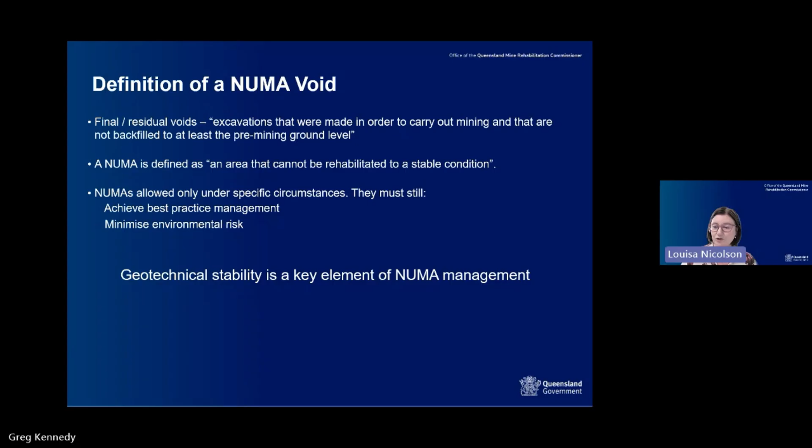And so with those definitions out and we're on the same page, it's my pleasure now to introduce our authors for this practice note who are going to present to us today. So it's wonderful to have Greg join us. Greg is a principal engineering geologist at PSM. He has over 16 years experience working on various domestic and international mining and civil engineering projects. Greg's worked on projects across Australia, Asia and the Pacific, and interestingly, this includes the geotechnical superintendent role at Ok Tedi mine in Papua New Guinea.

I suspect, Greg, that was quite interesting but challenging all at the same time.

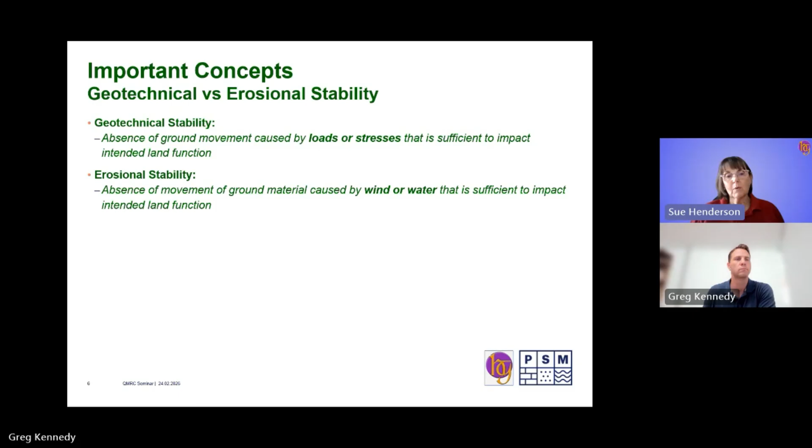Next one that we need to hammer home, and we will be for some time in this talk, is that geotech stability is not a certain thing. We can't quote it to 3 decimal places, or if we do, we're kidding ourselves. Some of the reasons: the profile has not been designed by us. Whoever put it there is a bit wacko at times. So there's random layers and pockets. Soil and rocks are not manufactured materials, so they don't have a predictable QA'd band of properties. The properties they do have can vary with the load history, also moisture content, time, and of course spatial variation.

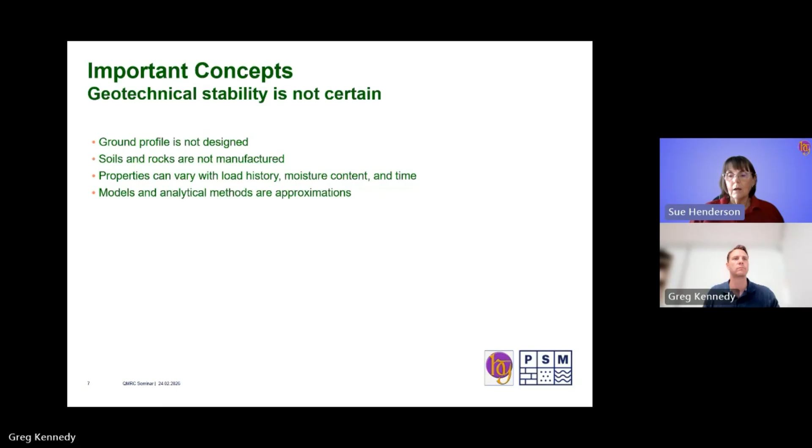The models that we use to analyse stability are approximations, and how accurate a particular model is really depends on how well it captures the important aspects in this particular situation. So the upshot of that is there is no single correct answer for stability. Instead, what we as geotechnical engineers have to do is define a threshold or an acceptable outcome that's based on both the confidence we have in our particular model and method of analysis, and consequences of instability. And that requires judgment. It's not something you can dial up out of a recipe. So that's where the professional training and experience comes in.

Given the uncertainties, the load history, moisture effects and things like that, an appropriately qualified person can't guarantee stability for a significant time into the future. All we can certify is that we have evaluated stability using sound and accepted procedures.

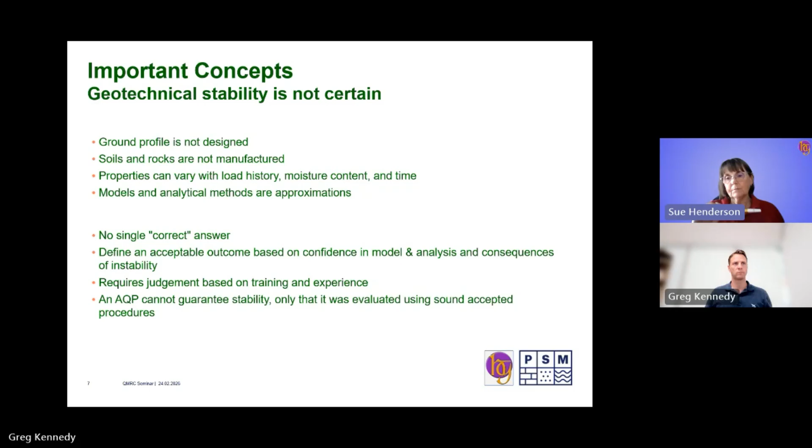Next idea here to put out is that it's not about maximising or minimising risk of instability, because what you do to improve stability can make other aspects of your NUMA worse. First example, flatter slope usually improves stability, and it certainly can reduce uncertainty. However, it also increases your void footprint. It may increase the catchment, which leads to a high pit lake level, which in turn might saturate more of your low wall and change your stability.

The longer slope may actually be subject to increased erosion, and flattening the slopes, particularly where you've got a dump, will reduce your dump space that way, so that what you would have put there, if you could have justified a steeper slope, you've got to find somewhere else to put that material.

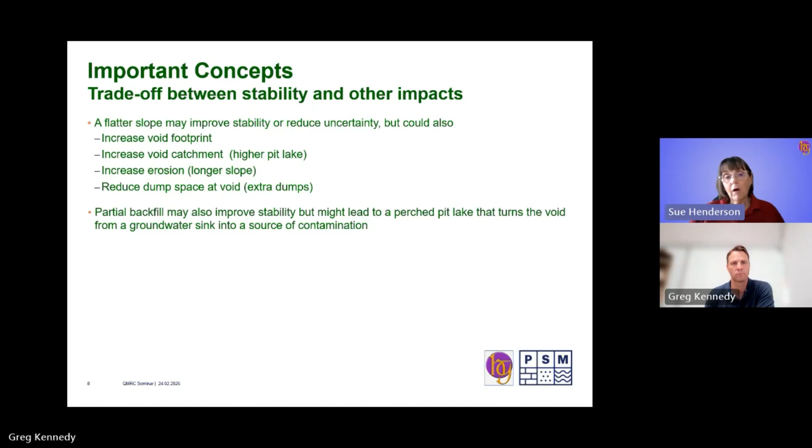Another example, partial backfill of voids, that can improve stability, usually by just reducing the exposed height of your walls, but it can lead to a pit lake, and that might turn what would have been a void that is a sink for groundwater into a source of contamination to aquifers.

So once again, we come back to this: rather than maximising stability, aiming for an acceptable level of stability. That depends on consequences, and considering that, particularly in the context of this practice note, we've got a NUMA, but it's got usually adjoining post-mining land use areas. So while this practice note is about the NUMA, one does have to give consideration to the adjacent land.

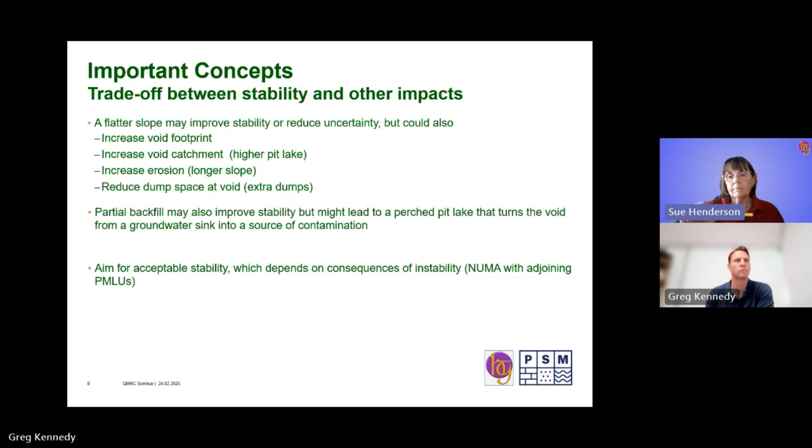So if all of these things and bad news about what we can and can't do hasn't come home, the basis is we can't certify in the long term. If we're uncertain now, the uncertainty can only multiply the further into the future we go. Trying to, as the AQP, assess what's a reasonable frame. If you think about living memory, 60 to 80 years. There are photographic records of landforms in Queensland in our area of about 160 years that you could use to gain some insight into the long-term changes.

In civil, design life is about 60 years. Even your critical infrastructure like hospitals is only about 100. So they set the time frames on which accepted understanding is that we could reasonably make some forecasts. So on that basis, we're suggesting that the range for long term is in the order of 60 to 100 years, to be decided at each assessment based on the information you have, the complexity of your model, how confident you are.

Quick pause for any comments or questions on that stuff. We haven't had any questions come across into the chat or the question and answer yet, Sue, so we might just keep going, I think. Thank you. Oh.

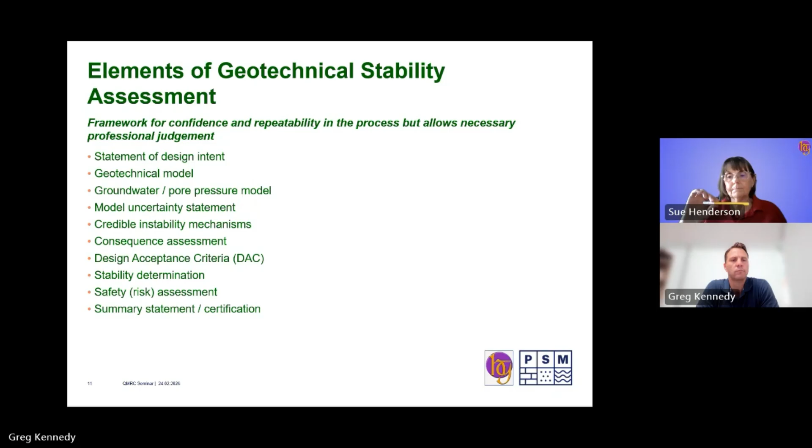So the first component, statement of design intent, is really where the geotech engineer just communicates out in the report to the audience what the point of it is. It's a typical scope and limitations type introduction to a report. Obviously, the purpose, the location of the NUMA, given the number of peer reviews I've done, that becomes very important. The time period that you have assessed, where in the 50, 60, 100 years you feel confident to forecast, and importantly, any changes that would mean you need a reassessment.

I'm not going to go through this. It's just an example of a statement that I put in, so it'll be in the slide pack and presentation, but it's not a difficult thing to cover, just important to put it there to hold the whole assessment together. Now we get on to some of your engineering stuff, and I'm going to pass over to Greg to carry on. Thank you.

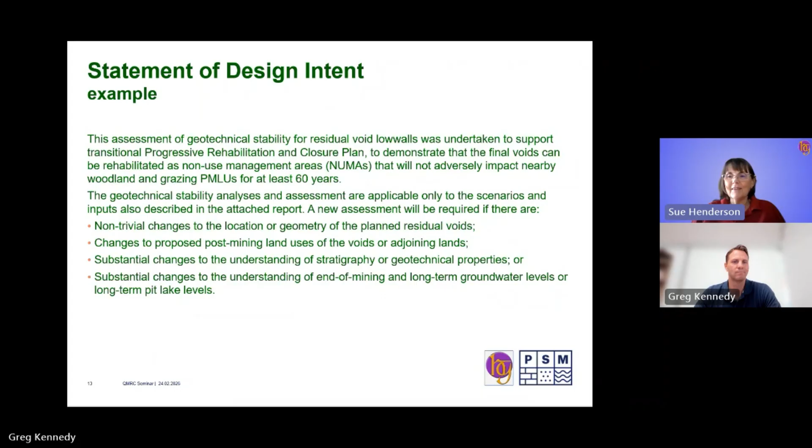Thanks, Sue. Unfortunately, I'm going to start with a definition as well. So the definition of the geotechnical model, the Australian standard gives a great one. It's the interpretation of ground conditions in a form useful for engineering design or assessment. It may contain a subsurface model detailing geological and engineering characteristics of various materials and groundwater. So obviously, ground conditions, especially over a mine site scale, are often complex and highly variable. And one of the most important tasks for the geotechnical practitioner is to review and simplify these variable ground conditions as much as possible into something useful, i.e. a clear and logical framework that can be confidently used for stability analysis and design.

The geotechnical model, obviously the ground is in 3D. It presents and communicates the ground conditions. Models can be 3D or 2D. Many of the components of today's geotechnical models are created in 3D, but stability analysis can be either 3D or 2D, depending on the mechanism. And most often the model is illustrated in reports in 2D cross-sections and plans.

The closure geotechnical model should include information on the landform design. So that's anything like the pit design, the surface topography, mining, environmental, cultural heritage, or public lease boundaries, and any infrastructure such as buildings, drains, or flood levees. It also includes the geological model. That'll include information on the deposit type, because that's quite important to understand the geotechnical conditions, the stratigraphy, lithology, weathering, alteration, and distribution of geological units.

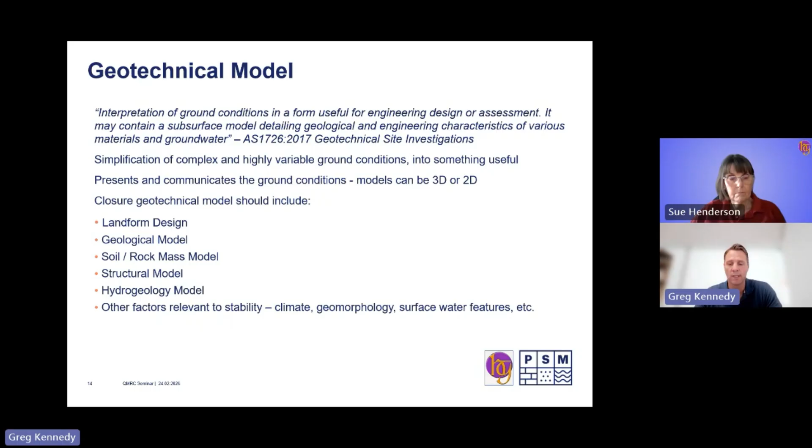There's also other factors which could be important. So the climate is one. A mine site located in the tropics, for example, will perform differently from a geotechnical perspective to a mine site located in the arid desert, just due to the amount of rainfall. A high rainfall environment is going to advance your rates of weathering, erosion, and result in a lot more pore pressure loading events on the slope, which can have an adverse impact on stability.

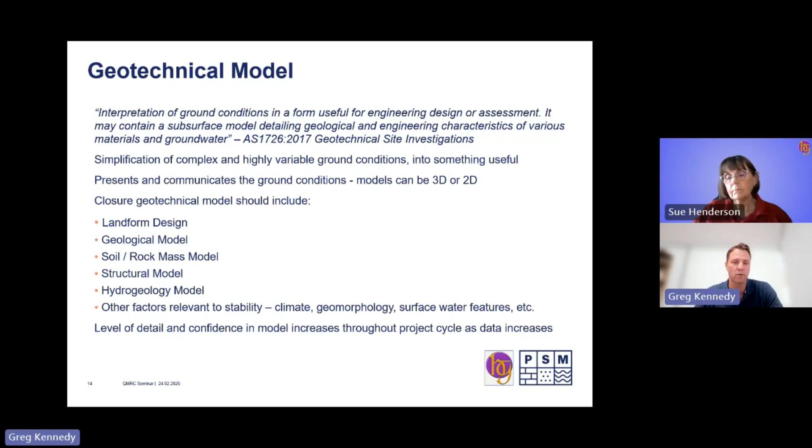The level of detail in a model typically increases throughout the project cycle. Obviously, a model developed during the planning stages of a project, which is likely to only be based off a small number of boreholes, is going to have a much lower confidence or higher uncertainty than a model based on excavated slopes for an operating mine that's approaching the closure stage.

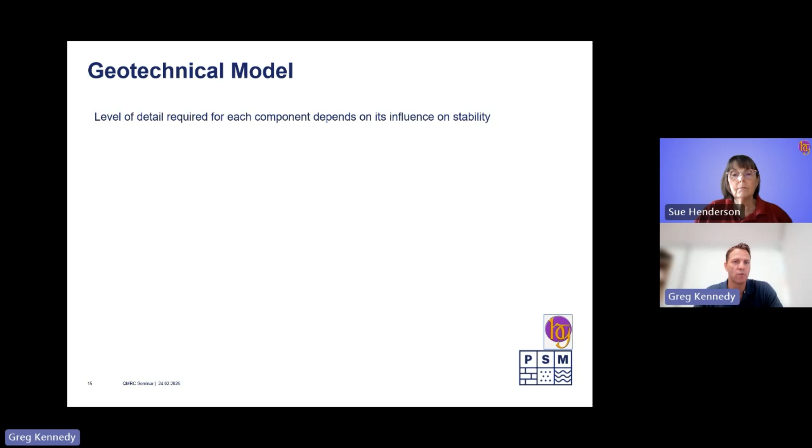The level of detail that's required in each of those components really depends on its influence on stability. Within a soil or highly weathered rock mass deposit, the material strength governs the stability, and pore pressures also play an important role. Within certain types of deposits, such as residual soils like saprolites, the relic structure of the parent rock mass can also influence stability, so that also needs to be considered.

Within soft rock, which typically includes Queensland coal mines, all aspects are important, but intact and rock mass strength and structure are typically the most critical, and pore pressures do play an important role in certain situations such as footwalls or where the stability of the wall is already marginal. Within certain mines, there's some geotechnical features which deserve particular attention. So within coal mines, bedding orientation, bedding strengths, whether it's sheared or not, and the presence of any weak layers such as tuffaceous units are very important to identify, as they quite often have a big influence on the stability.

Within hard rock, stability is entirely controlled by structure. Where the structural stability is marginal, pore pressures, and in particular transient pore pressures, play a big role in influencing the stability. So during high and prolonged rainfall events, the transient pore pressures can load those structures which may be marginal and cause movement and deformation in the slope.

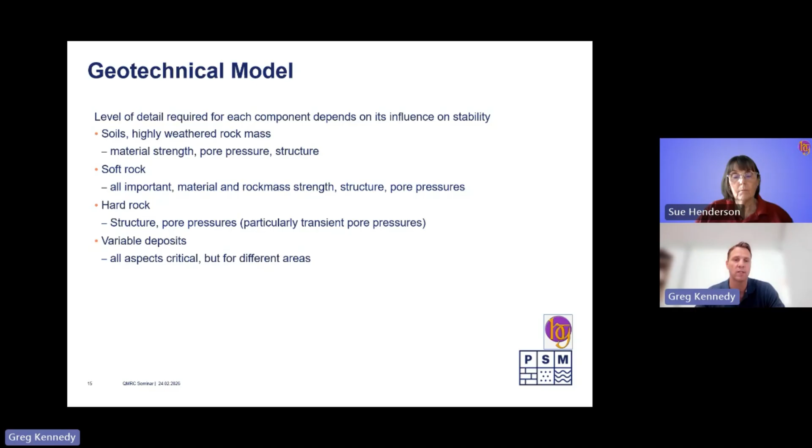The model for closure is similar to an operational design, but it needs the additional focus on the long-term effects on material properties and performance. So things like weathering, degradation, durability, and erosion over time. This slope here provides a good case study of why that is important. This slope was excavated within tertiary sediments, so lignites, clays, some reworked basalts, which have since weathered into clays. And these were all capped by an overlying cap of fresh basalt, which continuously recharges groundwater into the underlying clay units.

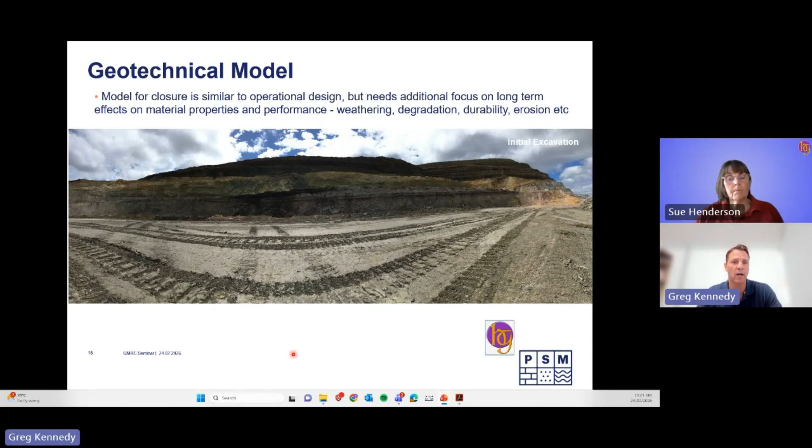The slope was excavated within a strip mine, so pit walls were sort of turned over every 9 months. The material was relatively stable for those short time frames required for a strip mine. But then mining unexpectedly stopped in the strip, and as the material was prone to desiccation and strain softening over longer time periods, the slope began to deteriorate and experience progressive failure. So this is 18 months after the slope was first excavated, and more recently 6 years after, and you can see the effects of this progressive failure on the slope here. So this serves as a good example of why closure models need to include potential long-term effects on material properties and the failure mechanisms.

We're going to go through a couple of case studies now to illustrate geotechnical models and how the different important components are presented. We've got one case study of hard rock, which I'll go through, and then Sue's going to go through a coal example.

So for this example, this is pretty simple geological conditions. It's an intrusive deposit with shear-hosted mineralization, has various types of granite lithologies with pretty gradational contact boundaries between each, but they're all very similar from a strength and durability perspective. So the geology model doesn't actually have a huge impact on stability.

For the rock mass model, there are some localized brecciated zones around faulting, but typically it's all high strength, it's all blocky rock mass, and it's not a critical control of inter-ramp or overall scale stability. It does control the bench scale to a certain degree.

The hydrogeological model, the VWPs installed in the slope show a depressurized slope. So as the mine progresses, the slope quickly depressurizes. But this mine is within the tropics. So transient pore pressures from the wet season, from those high prolonged duration and high rainfall events, do have an impact on stability wherever the structural stability may be marginal.

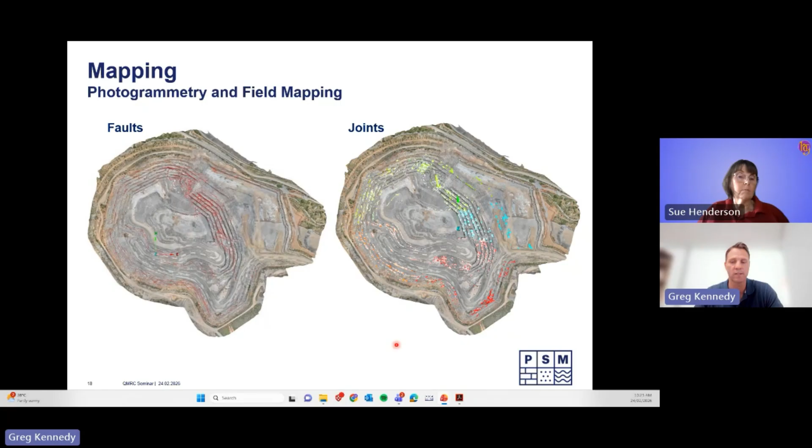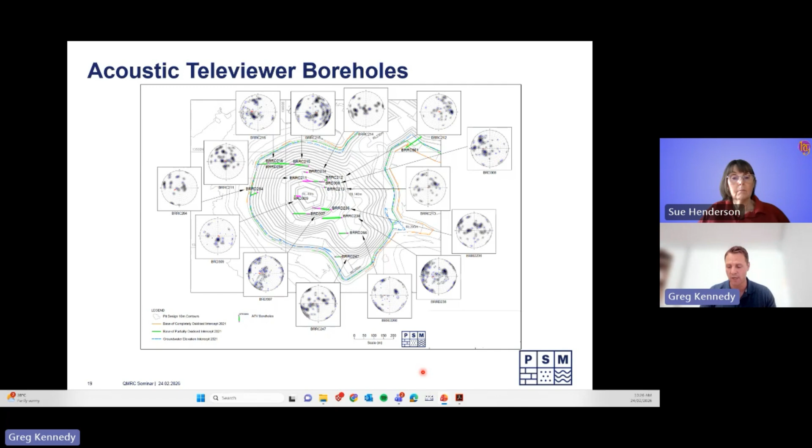We also reviewed a lot of acoustic televiewer boreholes beyond the pit slope to try and get a better understanding of the conditions beyond the pit walls. For any geotechs and geologists there, you'll see there's quite a bit of scatter within all these boreholes. So this is a very complex, structurally complex system.

We then used all that data to create a detailed structural model covering the key influences on stability, such as we created 3D surfaces of any major faulting that were inter-ramp scale or greater. We also came up with structural domains. So these are areas of similar structural conditions, which really help to remove the scatter from a particular area and make sure you're only making the assessment based on the data that's actually within that spatial area.

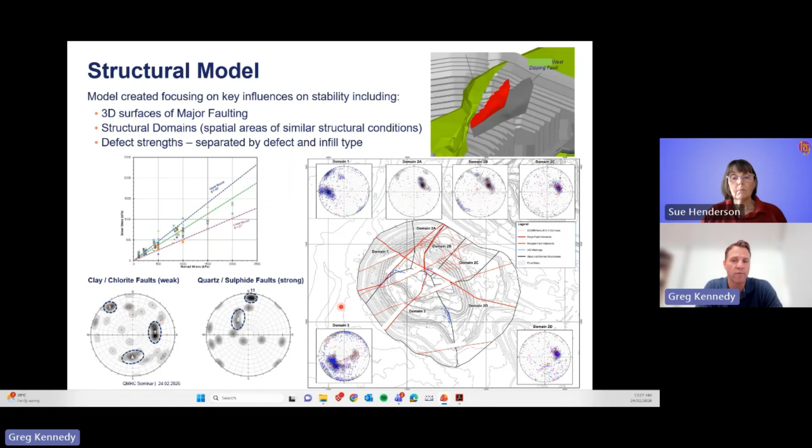And we also did a lot of work looking at defect strengths, separated by defect type, then infill, and we were able to do that from the field mapping exercises and drilling and laboratory testing. So this model then allowed us to identify and quantify the credible failure mechanisms for each area of the pit, which I'll go over a little later in the presentation.

Okay, I'm here to reassure everyone that we don't always have to have it quite that complex. This is an example from the other end of the spectrum. Coal low wall. The void was about 100 metres deep, had a relatively steep floor dip, steep coal seams. 2 strips were mined out by truck and shovel, and as is typical in strip mines, some of the spoil was dumped back into the pit against the box cut.

A creek overflowed into the pit while they were still mining, caused large slips in the low wall, and that was when mining had to stop. In the 10 years since, there's been a bit of continuing movement at the cracks, but no further large slips.

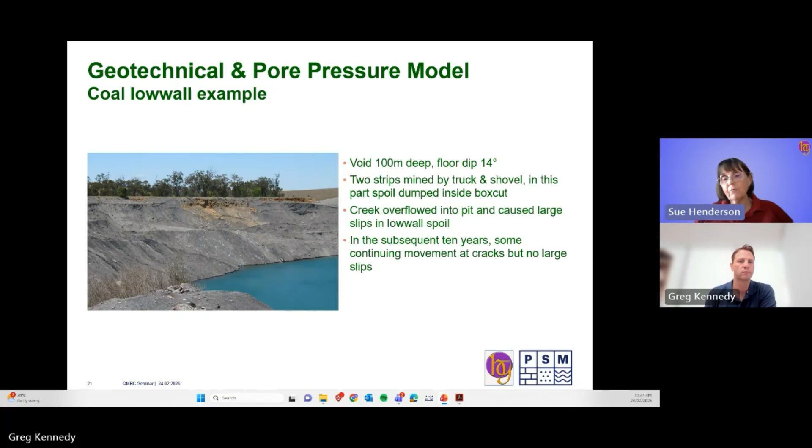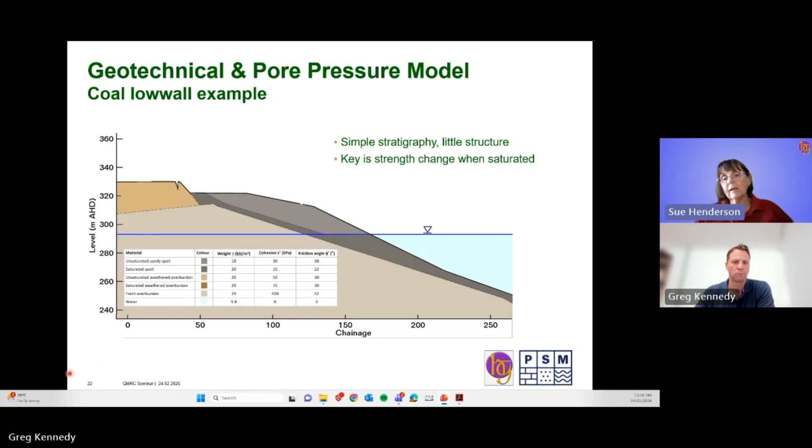So in this case, strip mine 2D analysis is fine. You can see that it's a very simple stratigraphy, not much structure, which is typical of spoil. The key driver to stability in this case is the strength change when that spoil becomes saturated. So for the long-term stability assessment, we have to look at the pit lake as it is now and the predicted long-term pit lake level and carry the analysis out on that.

Another example, this was a coal high wall for a PRCP final void. I haven't got a photo of the wall because it won't be mined for decades. So it's really a planning stage, remembering that the PRCP planning part is to demonstrate that you can achieve the requirements of rehabilitation. So the geological model was used to develop the profile, the different layers.

Hydrogeological modelling from the PRCP and the void water balance modelling gave us the boundary conditions for pore pressures that were analysed between the two. And being central Queensland, there's a fairly good mass of published strength properties for your tertiary, weathered Permian, fresh Permian, those aspects. Simple model, but for the long-term planning at this stage, perfectly adequate.

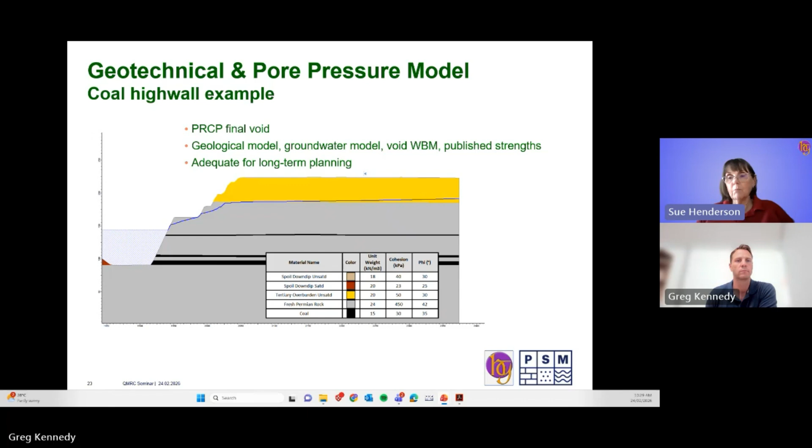Hopefully we've hammered this enough that with the model, we cannot be certain. There's a high level of uncertainty in developing the model. So instead of trying to ignore it or spend an unreasonable amount of effort minimising it, the approach is to address it and admit it. And this is probably one of the key things in both the ACARP and the practice note, is that we've developed an uncertainty rating sheet for the geotechnical model.

There are 8 model elements identified, and there's a score assigned to each that reflects their relative importance. And there are different scores for the hard rock and soft rock examples. 4 uncertainty levels for each of those, ranging from what is nicely called introductory to a low uncertainty, which would be when you've done a lot of work testing and probably have the wall there with observation. Description for each combination of model element and level, and simply you sum the score for the element times the weighting for the level, add all of those together for the different elements to get an uncertainty ranking.

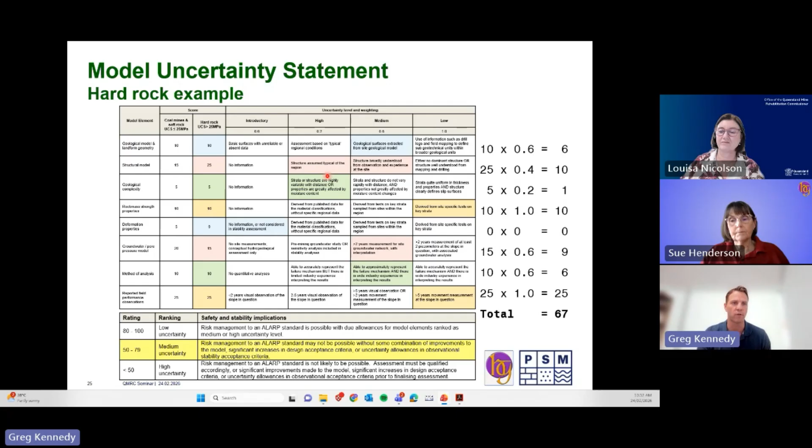Okay, so thank you everyone for starting to put some questions through. That was a really important session, I think, Greg and Sue, because firstly, it was important for us that this work could be broadened out to discuss hard rock mines and the differences for an assessment that are relevant there. And then also that the model uncertainty statement, I think, is really invaluable to this process and to helping us understand the approach, so thank you for that.

We have a question here about closure model best practice. Should parameters around weathering, degradation, etc. be site-based and lab tested, or are regional database inputs sufficient? Will I throw that question to someone in particular, or do we draw straws? I'll start. Thanks, Sue.

One of the problems, well, horses for courses, it depends on how important things are in the model and in the anticipated mechanisms. Weathering in particular most of the time looks worse than it is. It tends to be a very shallow effect. And so, except for particular cases where you have persistent weak layers, it doesn't penetrate very far. I remember reading one of the highest rates of soil development measured is about 8 mil a year. So what we get on the surface is a degradation and a raveling, which is an aspect of weathering, but it's only physical. But it tends to look worse than it really is.

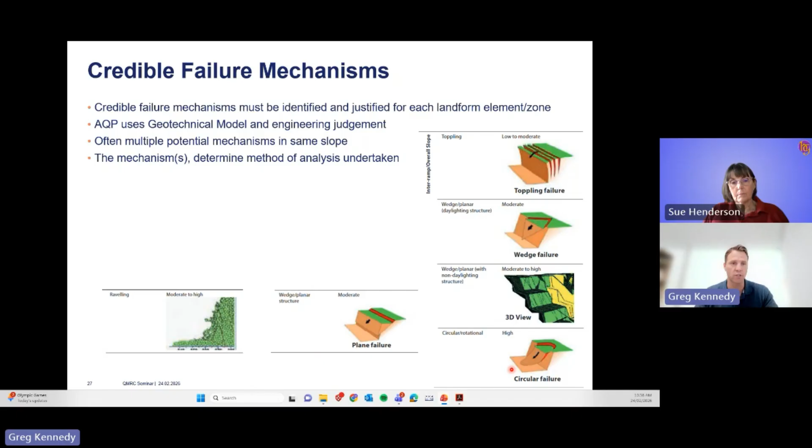The mechanisms identified will determine the method of analysis undertaken. And again, that's up to the practitioner's judgment to decide what method of analysis is appropriate. And the assessment of the failure mechanisms needs to account for these changing conditions over time. So like we were saying just before, the weathering, erosion, changes in groundwater is an important one for closure, because you've got to not only assess the groundwater conditions when the day mining finishes, but also the final pit lake level and potentially any stages in between.

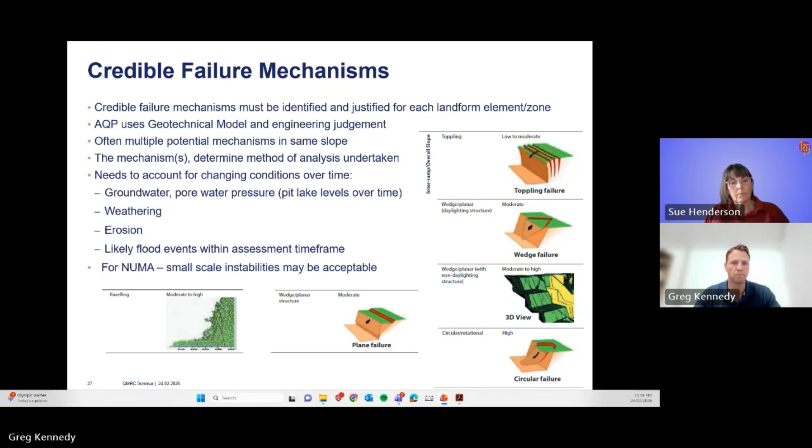And for NUMAs, small-scale instabilities may be acceptable if the consequence of failure can be proved to be negligible or low. The consequence assessment, this aims to identify the likely harm if instability was to occur based on the identified critical failure mechanisms. This table's been taken from the ACARP study report and can be used to help guide the assessment. The assessment ranks the potential consequence of failure from negligible to high consequence against 3 harm categories. So harm to humans, environmental harm, and property loss and damage. And the table provides some qualifiers to help guide the practitioner's selection for each.

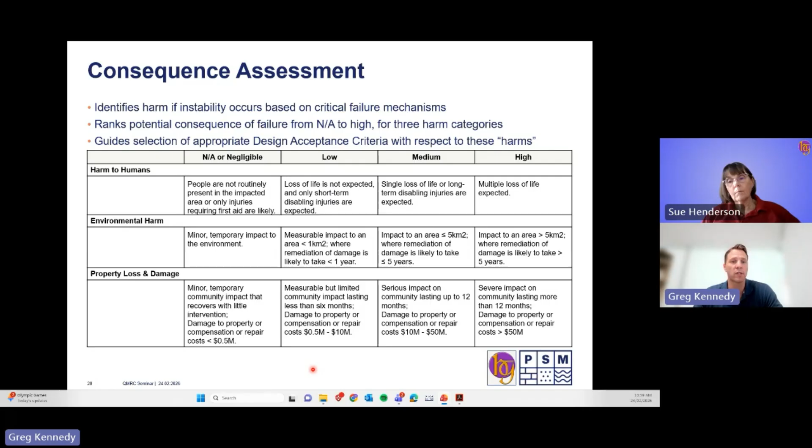And that's been assessed to have a moderate consequence of environmental harm, just due to the fact that if the slope failure was to occur in there, extending into the waste dump, the failure would mean there's some moderate rehabilitation, remediation earthworks required if the failure was to extend in there, just to be able to remediate that failure.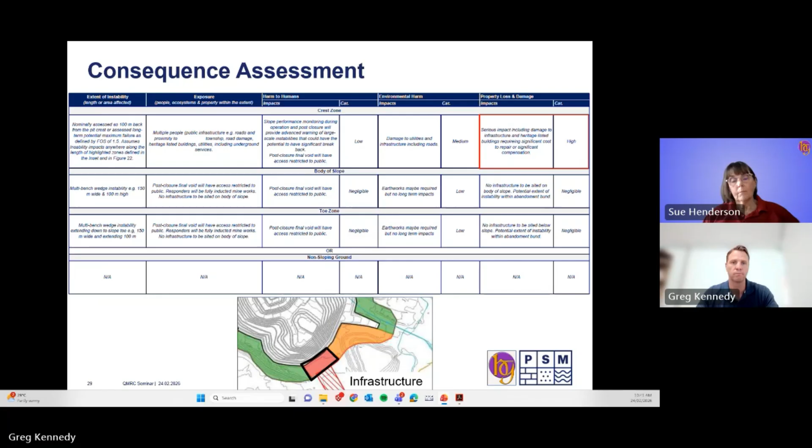The rest of the pit didn't really have any infrastructure or anything near the crest, and access was going to be excluded on closure, and therefore the consequence of failure was assigned negligible or low for those areas. The design acceptance criteria defines a threshold for acceptable stability. So if a landform achieves the design acceptance criteria selected, then it can be considered geotechnically stable.

There's a lot of different methods of stability analysis, and each of these different methods can produce a different parameter value for the design acceptance criteria. For example, a factor of safety. The factor of safety is the ratio of available shear strength of the soil or rock mass to the shear stress required to cause failure along the potential slip surface.

A strength reduction factor, or SRF, is a factor by which the shear strength parameters are progressively reduced until non-convergence occurs within a numerical model, i.e. failure. And SRF and factor of safety are typically taken to be the same. A kinematic probability of failure, POF, is used for structurally controlled designs and is the likelihood, expressed as a percentage or probability, that defects will intersect to produce an unstable volume of rock mass for any given slope orientation.

There may also be other design acceptance criteria more appropriate for the situation. An example could be acceptable deformation limits, where minor movement may be tolerable, so all slopes do move. Some mechanisms, such as toppling mechanisms, can move a long way before the slope progresses to collapse. I've personally been involved in managing a slope which moved more than 10 meters and didn't end up progressing through to collapse. So deformation limits may be an alternative design acceptance criteria if small but manageable movement is anticipated.

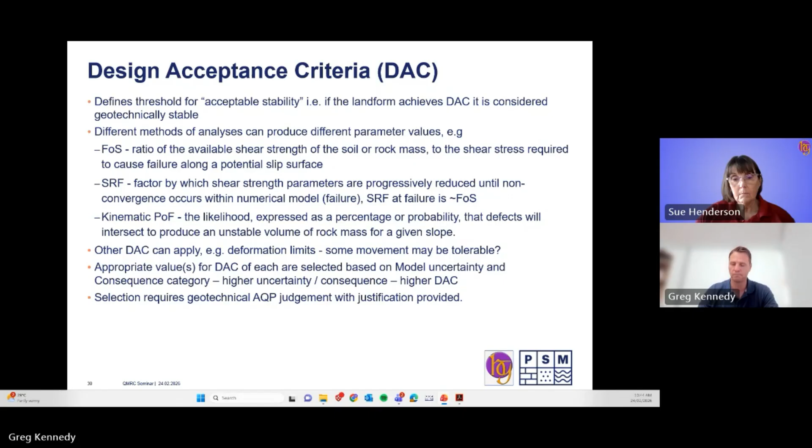So some suggested ranges for design acceptance criteria are appended to the practice note and also in published literature such as the large open pit guidelines for mine closure. And the practitioner should be aware of typical industry acceptance criteria for different methods of analysis and risk profiles.

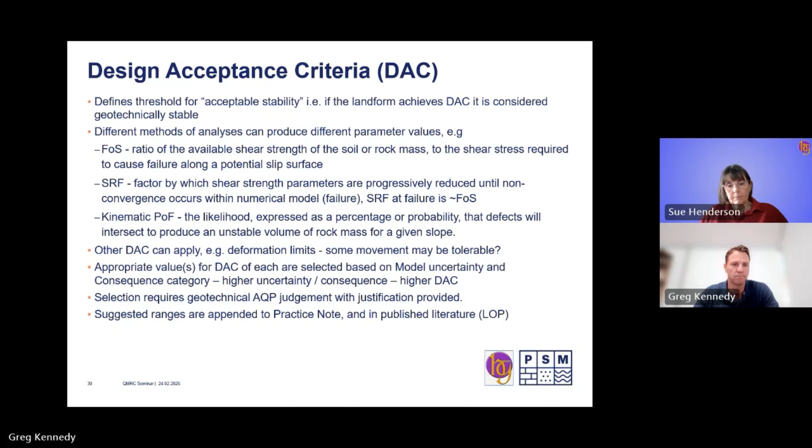Stability may be quantified using observational or analytical methods. Observational methods don't quantify stability directly, but they do quantify the slope performance over time. So for example, if a slope has been standing stable for 30 years with little signs of degradation or instability, there's a good chance it will stand for another 30 years, so long as the loading conditions do not change. Sue's going to provide an example of the observational assessment in her case study shortly.

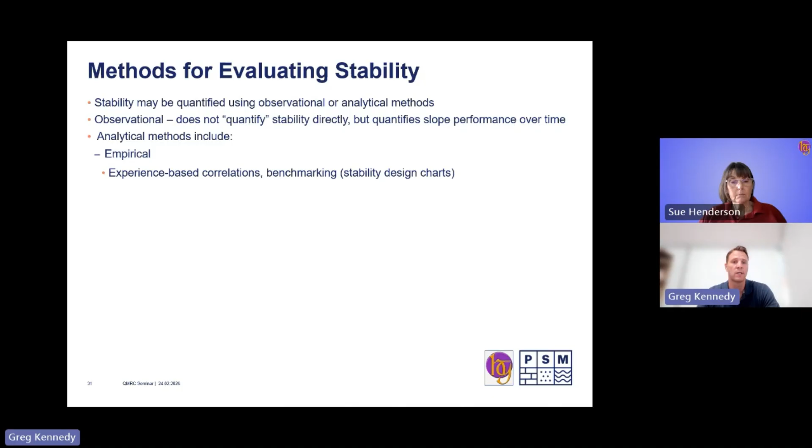As far as analytical methods, they can include empirical methods. These are experience-based correlations, benchmarking, such as stability design charts. For example, these may show stable and failed case study slopes over different angles and heights within the same geotechnical conditions. Deterministic methods include limit equilibrium, which is very commonly used. Limit equilibrium provides a factor of safety. It's typically applied to interramp and overall slopes where stability is controlled by soil and rock mass strength, with or without some structural anisotropy.

Numerical analysis provides a strength reduction factor. That analysis can allow for the impacts of stress redistribution within a slope as it moves. Good for quantifying progressive failure mechanisms and quantifying deformation levels.

And probabilistic methods for evaluating stability. So these provide a probability of failure and allow for incorporating variability and uncertainty in the parameters. These may be more useful, for example, with a structurally controlled slope in the planning phase, where you might only have a data set of structural orientations from boreholes with a limited understanding of the spatial location and persistence of the defects. And you've got to design the slope using a statistical method to ensure only a small percentage of those defects are kinematically unstable, which then becomes your probability of failure.

And typically, the level of analytical sophistication will increase as the projects advance and the geotechnical model uncertainty decreases. So you wouldn't expect to see advanced numerical modeling within a project that's in the scoping or pre-feasibility stage, because the model uncertainty is going to be so high that it's going to have a major impact on the reliability of the analysis.

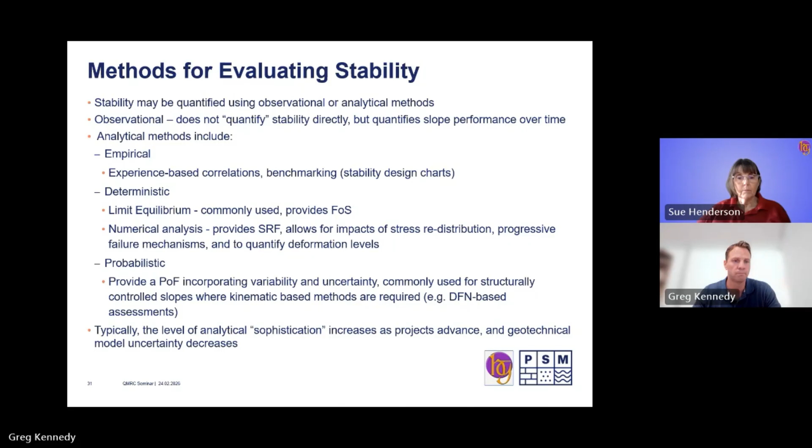So I'm going to go through a case study from our hard rock case study now. For that, we used multiple analysis methods due to the complex conditions. We made good use of the fact that this mine had been in operation for 40 odd years, and they'd mined a series of cutbacks within the same rock mass at steeper slope angles than were actually being proposed for this final design. So you can see here, they've successfully mined interramp angles up to 64 degrees. The rockfall risk within that, you can probably see there's not many berms or anything like that. So that is something to take into account, but on the overall scale, it did manage to stand up.

To quantify this, we first measured the interramp to overall slope performance by assessing achieved probability of failure of the current and historic slopes. So we measured any areas of the pit that had failed on a multiple bench or greater scale, and measured that as a percentage of the total pit wall area. That confirmed that even when steeper pit wall angles had been used in the past, the interramp to overall slope performance was within acceptable design acceptance bounds for mine closure, so the probability of failure overall was less than 5%. So that gave some confidence that the proposed design angles were achievable within acceptable probability of failure limits, so long as the structural conditions were consistent.

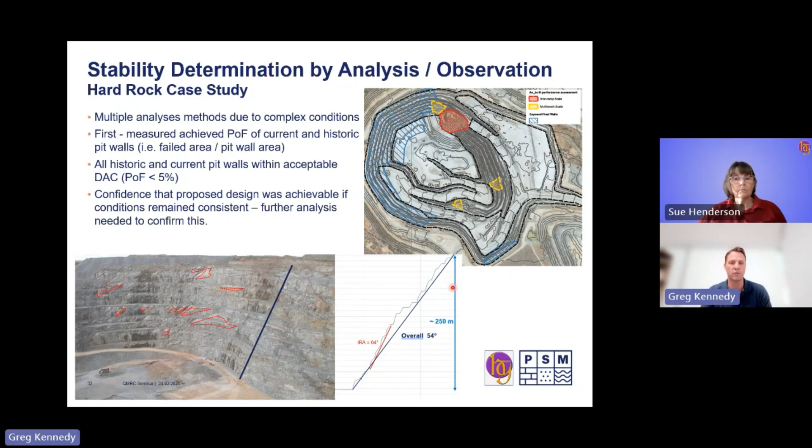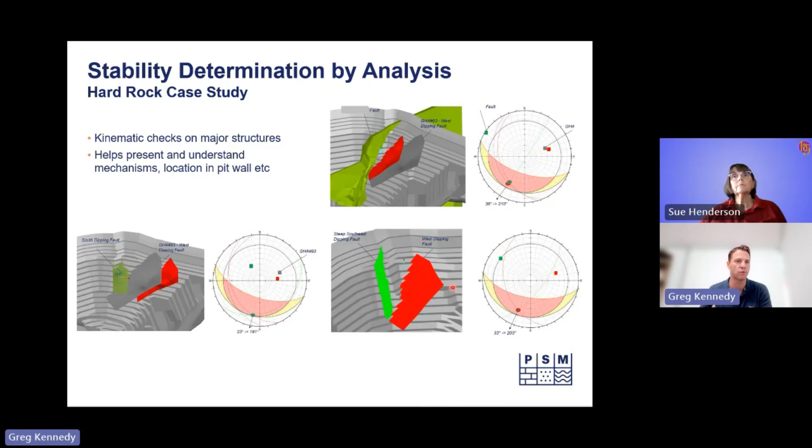So we still needed to do some further analysis to quantify the conditions and make sure that there were no kinematically unstable intersections within these proposed final walls. So we did that, first of all, by looking at all the modelled 3D structures; we did a basic discrete kinematic check, essentially on the major structure intersections, using all our mapped and modelled structures with respect to the pit wall aspect and location of the pit wall that they intersect. So that really helped to present and understand the failure mechanisms that we were dealing with, the scale, whether they were a wedge or more of a complex mechanism. And that helped feed into the more advanced analysis that we also did.

This is one example of the advanced analysis that we did. So we did a deterministic 3D limit equilibrium analysis on the mapped and modelled faults. That checks for potential kinematically unstable wedge and complex 3D mechanisms. The good thing about this particular type of analysis is that it also checks for successive block failure, i.e. a progressive failure. So within hard rock mines, often the loss of a key block in the slope or a failure of a small wedge in the middle of the slope can destabilize wedges further up the slope, i.e. trigger a progressive mechanism much larger than that original wedge failure.

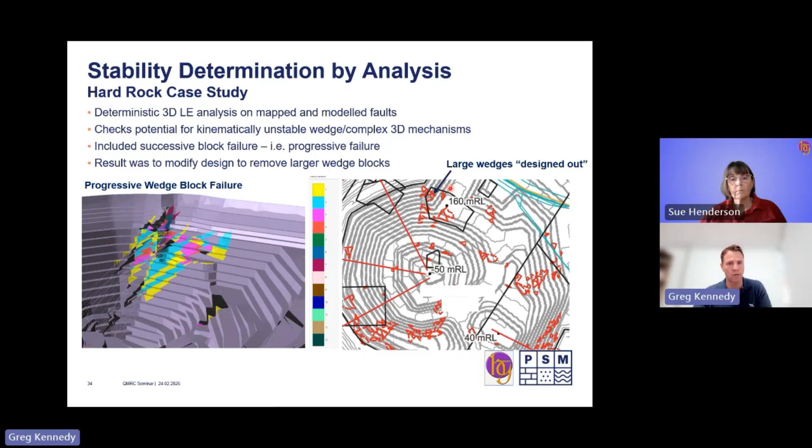Now I'll throw it back to Sue. Back to the easy stuff, the coal mines. There's a reason I stick to the coal mines, I can tell you.

Again, this one is a typical coal mine void in a strip mine. In this case, the high wall and low wall on the same.

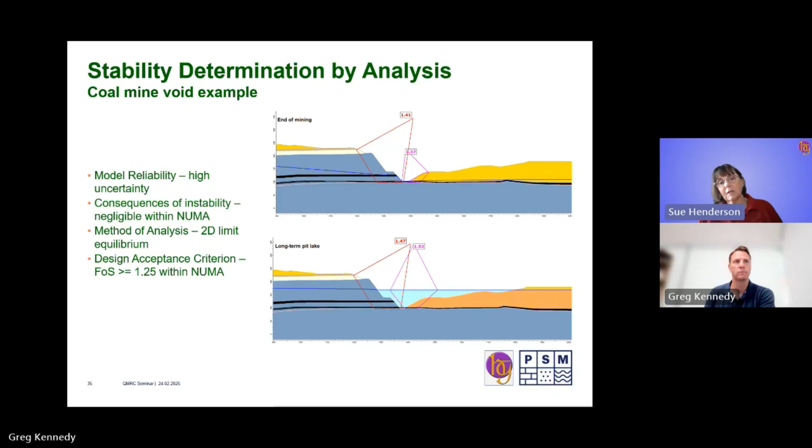If you don't meet your design acceptance criteria, either change the consequences by changing where your more valuable features are, if you can, for example, a road or a grazing boundary. Or if you can't do that, if it's a river, then you have to look at alternative measures to either stabilise, or again, you may have opportunity for further investigation to improve your certainty in your model.

This observational determination, it isn't respected, I think, as much as it should be. It's very normal in operations during mining to assess stability by a documented inspection. Once you've got your basic geotech model and you understand the mechanisms that could give you problems, just observing whether or not they are manifesting is the strongest indication of stability you can have.

Also, if you're observing an existing wall, you've already taken away all the uncertainty between your desk and designing at that point. If it's stable today, then it's only likely to become unstable in the future if there is a change either to the ground stresses or strengths. So going forward for long term simplifies down to identifying potential changes.

Any given observation is a point in time, granted, but if you've got all your operational inspections and then going through the period while rehab is being undertaken, you can build up a time series, and that does give you some good insight into the nature and rate of any of the changes that may occur.

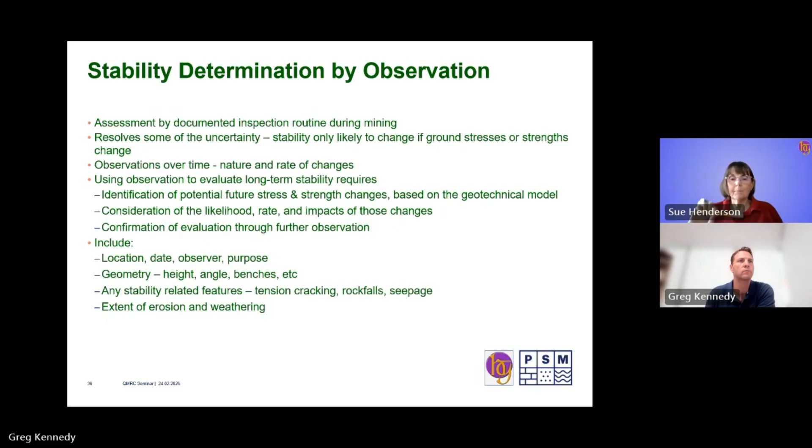There were two sets of adversely oriented defects. They were at quite close, tense spacing, and that's actually a good thing because that means if they intersect unfavourably, you'll get small pieces of rock rather than large wedges coming out. The high wall had a pretty small catchment of runoff draining over it.

So the anticipated future load changes is that the ongoing stress relief could open those defects, those joints, a little bit more. You can expect some continuing small rock falls or ravelling, as we call it. And of course, in the long term, lake level, it's quite low at present. And given that the base of weathering is a long way up the wall, it's unlikely the predicted water table is going to get up there where the materials are susceptible to strength change on wetting, no undercutting.

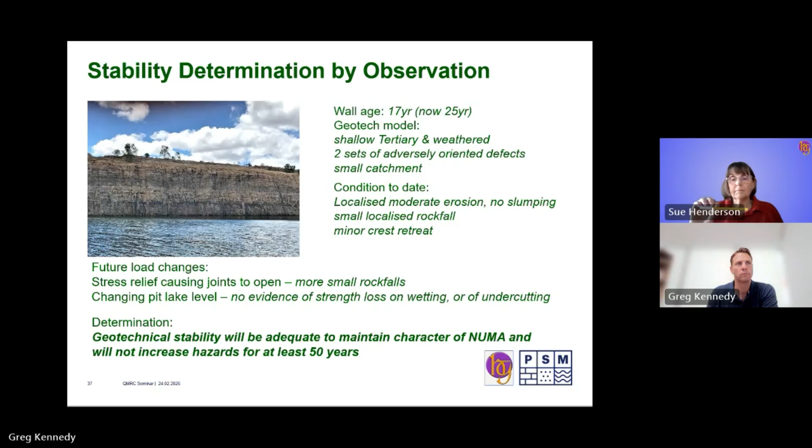Okay. Short breath. Yes, everyone take a breath. We've got a couple of questions. Well, we've got lots of questions, but time for a couple.

A question from Kane. How to account for slaking of saturated materials in coal mine voids, and do you get a loss of strength over time that needs to be accounted for? I'm assuming, Sue, you might like to take that one. Okay, I can start on it.

Again, slaking is part of this degradation aspect, and it really is a fairly shallow phenomenon. You certainly are aware of it already operationally. It tends by and large to cause a bit of surface ravelling, so you certainly wouldn't promote a particular void for water sport where someone was getting close to the wall. In a NUMA, unless it's a case where a material tending to slake is underneath a harder material and you can get the undercutting, it doesn't usually cause much trouble, a little bit of retreat.

Slaking, as I say, is one of those ones that looks bad, but the wetting front only moves so far. And so it's quite a slow thing. If you have those sort of circumstances where you're undercutting another layer and you can then create a toppling type failure or a major wedge, they're the only cases where it's a biggie. There's a lot of ways of assessing slaking for operational purposes. They're all quite simplified because we want them quickly.

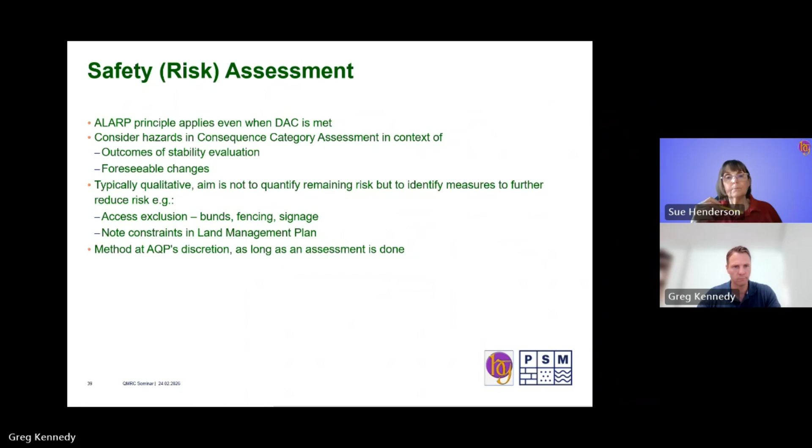Last component is the certification, which really is formalising what is already our professional responsibility. Stability assessment is considered a professional engineering service, and therefore it is governed by the Professional Engineers Act. That requires that the work be undertaken or directly supervised by a competent geotechnical RPEQ. It requires that our communications and our evaluations in the assessment report are specific and accurate.

And this is important because, given the uncertainties going into the future, if we were to write that we guarantee stability indefinitely, that could be taken as a breach of the Act because that's stating something that we can't be sure of. And that's where this whole process of focusing on the reliable and repeatable process came from. As I say, we're already bound by those standards under the Professional Engineers Act.

Certification is a way to just provide clarity and confidence to the reader, be it the client or the regulator. So you state clearly that accepted practice was followed, although as an RPEQ, I can't imagine what you would have been doing following non-accepted practice. You get a chance to restate the outcome of the assessment away from all the words and geeky stuff put in the middle of the report, and reiterate your limitations and assumptions, which may just be by reference back to the statement of design.

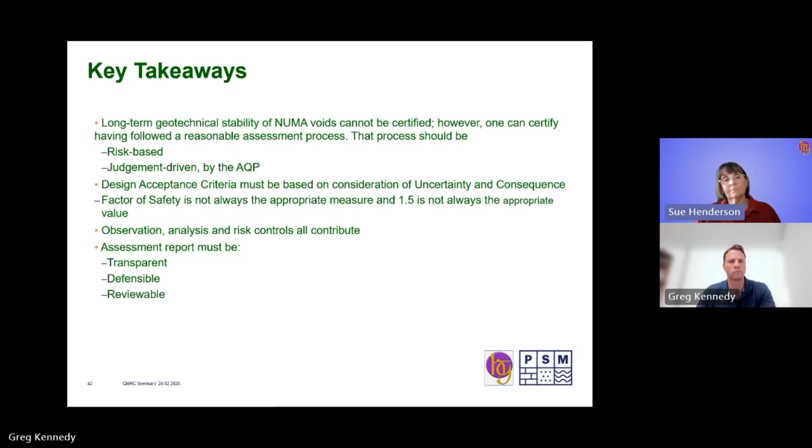The upshot of that is that factor of safety is not always the appropriate measure, and even if it is, there's no magic about 1.5. That may not be the appropriate value. Observation, analysis and risk controls must all contribute to managing NUMA voids, and the assessment report, to be able to provide the confidence that the regulator requires, has to be transparent, defensible, and reviewable by an independent peer. And I think that just about gets us to the end.

It sure does. Thank you. So we have some questions, which I'll start to roll through so we can use our last 15, 20 minutes wisely. So a question from Darren.

Thanks, Sue. In a world driven by processes that lead to peneplanation, that is the process by which a relatively flat land surface is produced through a long period of erosion, what is a realistic time frame for applying geotechnical safety assessments post-closure? And that sort of circles back to one of your earlier slides that we had.

Geotechnical stability, depending on your particular model, your mechanisms, your data, something in the range of half a century to 2 centuries is about the limit. We just don't have verified information any further. We have indication of geomorphology, but we certainly can't quantify any further than that.

I came across this in the early days, working with geologists on some of these stability assessments, and they shrug their shoulders and say, it's all going to fail. Well, yes, in geologic time, but we're really not looking at 1,000 years. And that's part of this process, being honest and upfront and saying, this is the time frame over which we believe it's reasonable, and that we have confidence in our evaluation. And that's it. It's at best a couple of 100 years, depending on the material, quite often less than.